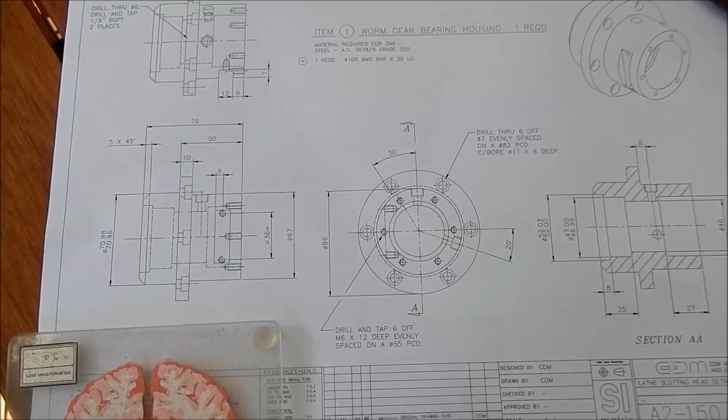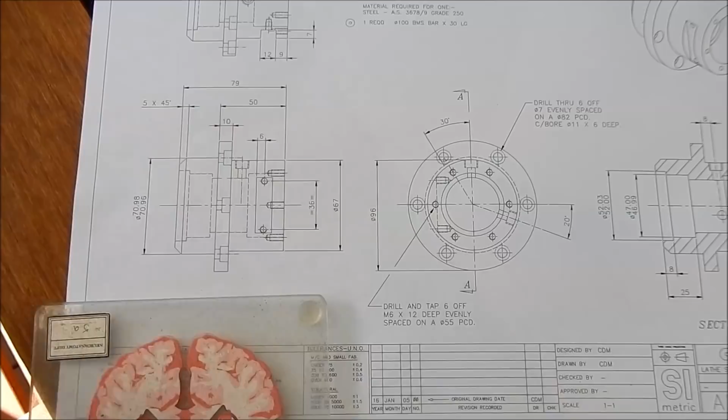Alright guys, so this is the bearing housing we're going to be making up that supports the worm. It's a fairly straightforward turning job, nothing real fancy in this. I've got to put on the OD on that, it's 96mm, so a little bit of milling. We've got to cut the slot for the anchor for the motor adjuster. But other than that, this is going to be fairly straightforward.

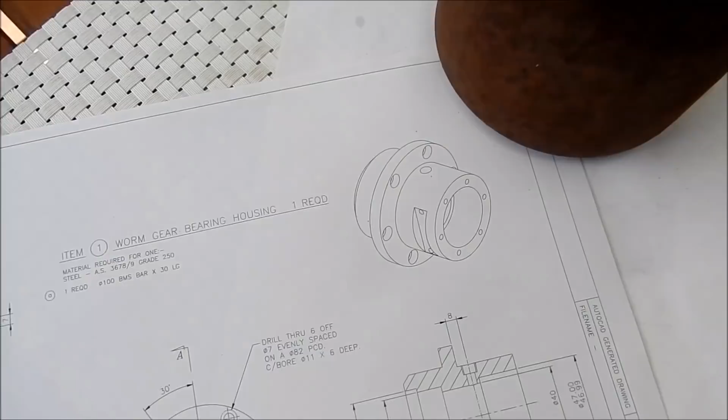I do have to remember the orientation of these holes compared to the slot, because as you know, I did make a little boo-boo on the housing. And I put them 30 degrees out of sync, so I'm just going to make sure that I reorientate that slot to suit where I've actually put those tapped holes in the housing.

Just the bearing cup registers up inside. As I said, fairly straightforward. We've got an oil filler and we've got an oil leveler. This is going to have its own little independent oil supply. It's going to be separately sealed from the main gearbox.

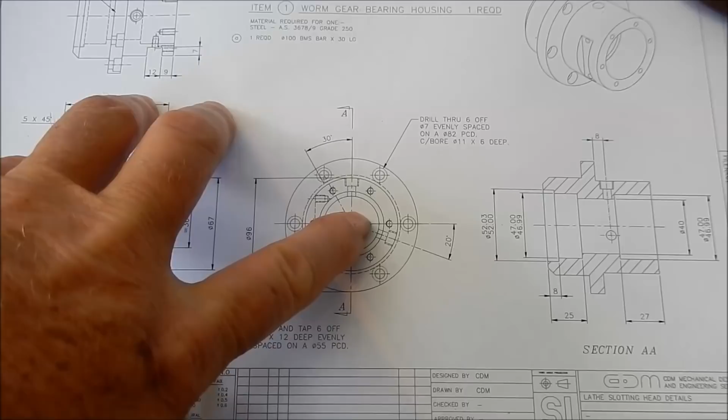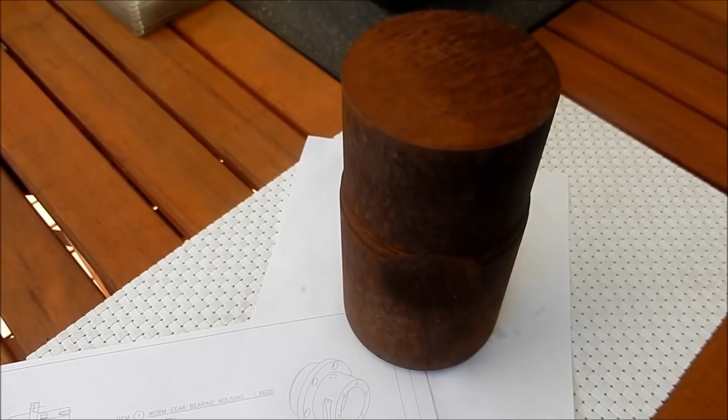And this is the stock we're going to be using to make it up out of. This is stock that I got from my scrap house again. This is probably down to about 200mm. I got this, it was about 1.5 meters. It had been hacked off with an oxy cutter when I got it, and it's always had this smoothed out scoop in here.

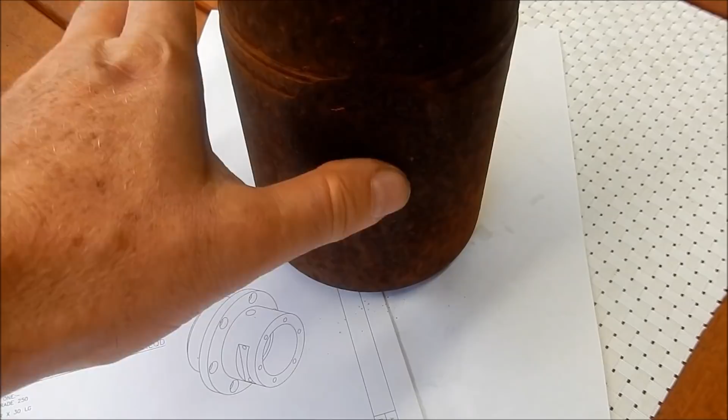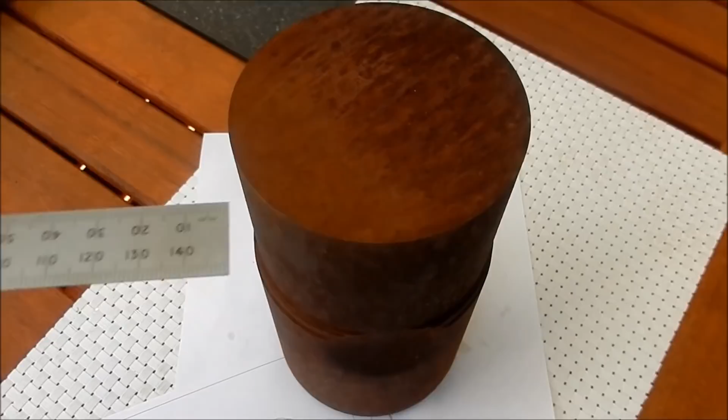Whether, for what it was being used for, it developed a crack, or there was a problem with the machining, it's a non-critical part of the shaft, and it's just had this little spot here buffed out. So I've used a lot of this over the years, and as you can see, not much left. So this is the stock we're going to be using. As I said, the cleanup is 96. And we've got an OD of about 98, so we've got a couple of mil to play with, which is beaut.

So I'll set that up in the bandsaw, and we'll cut that to length plus a few millimeters for cleanup, and we'll get to machining. Righto, so we're cutting that stock off at about 83-84mm, and as I've said in the past, I've refurbished this bandsaw, and it cuts spot on square now, so I can cut pretty close to the finished sizes and know that it's going to be able to machine up. So we'll let that do its thing, and then we'll come back into the workshop, set up and start our roughing out process.

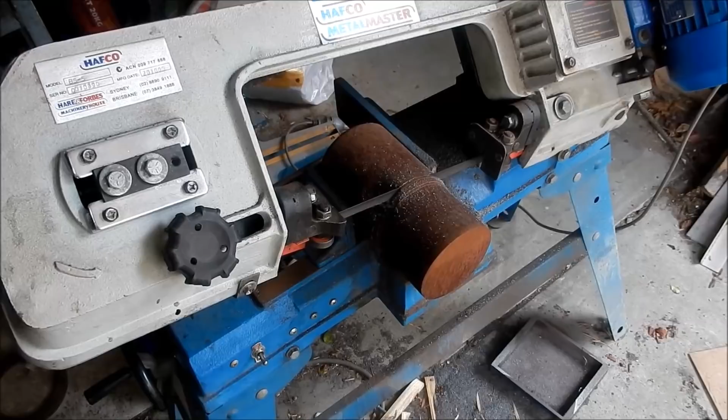Right, we've got our stock centered up in the lathe on the 4-jaw, just roughly. So my plan is I'm holding this side here in the 4-jaw. I'm going to rough this side here out. So I've got to make sure I allow at least 50mm, 53, 54mm to be able to clean up that OD. Then I'll cut and I'll bore. And once again, all we're going to be doing is roughing it out.

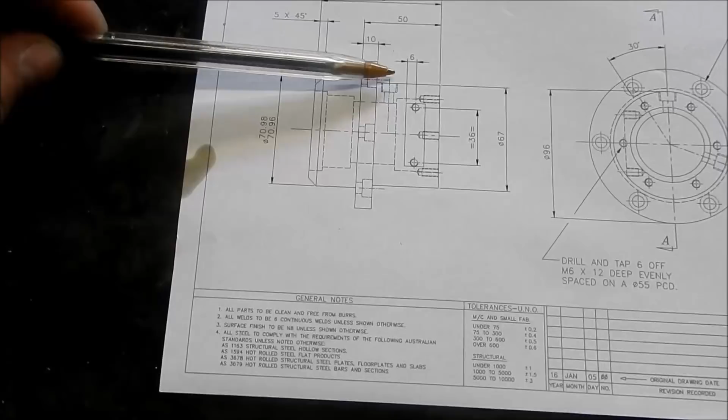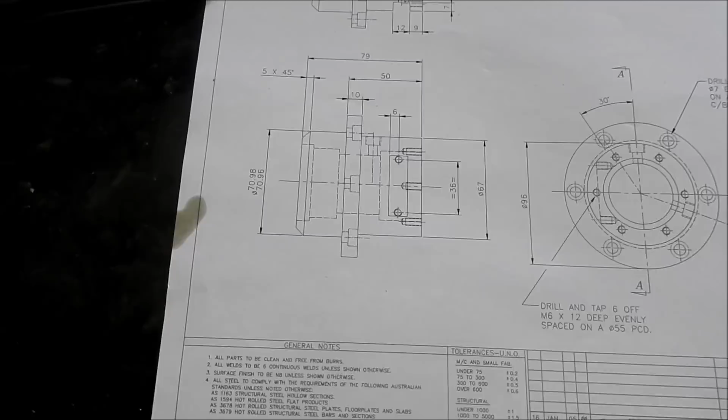Then I'll turn it round. We'll do the machining on here. Get that roughed out, then flip it back, and then we'll start the final machining process once we've got this roughed out. So we'll rough it out about 1mm oversize all over, and then we'll come back and finish it out. Alright, we'll get back to the lathe.

Nice to be finished milling. Nice to be out of that for a little while and do something different. So we'll set the camera up, and we'll make a start.

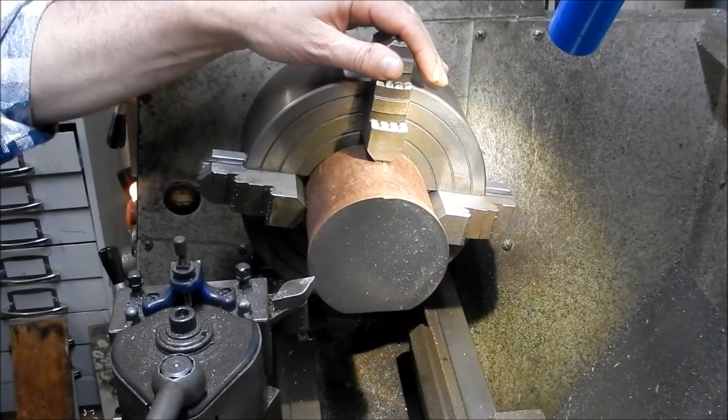Righto. It's just a bit of gnarly steel at the moment. This is probably a 1045. It's not a chrome moly steel in any way. As I said, I had about 1.5 meters of this that I've used over the years, and machined it into various bits and pieces. So I'm comfortable that it's just a medium carbon steel, so it machines quite nicely. Alright, we'll start that roughing out process anyway. We'll get the OD to within 1mm, then we'll start doing all the steps.

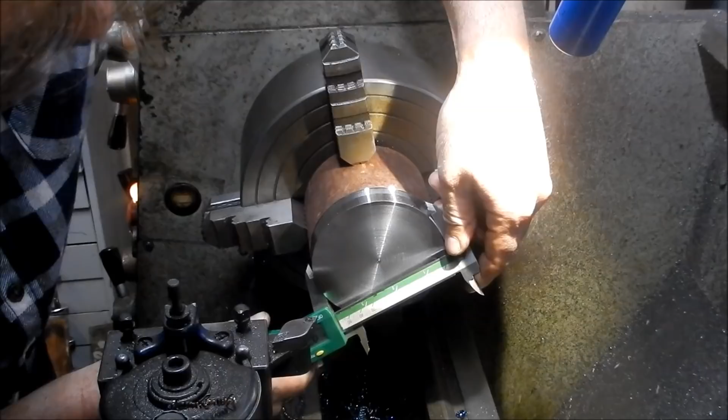We'll just do our roughing out, measuring just with the calipers. So that's at 97, so I'll continue that through. I'll continue roughing this out and bring you back in stages as we work our way through it. So we'll get this side roughed out and we'll come back very shortly. Alright, we'll bring you in for the last couple of roughing cuts.

A little bit noisy with the high feed on that, but anyway, so we're down to about 71.4. And we're aiming for 67.

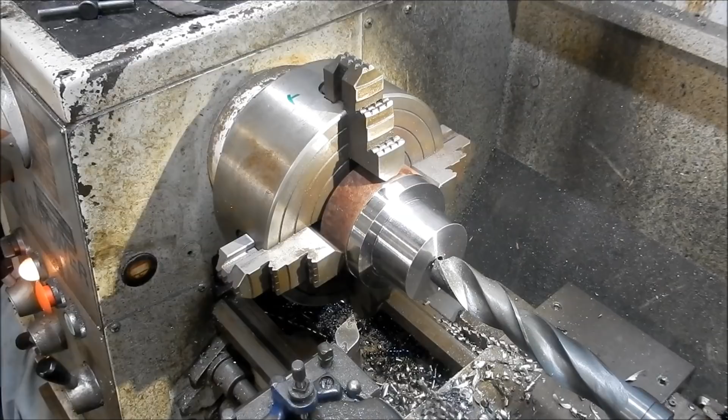Right, finished size on the smallest bore internally is 40mm, and unfortunately my next size drill up from this 30mm is a 40mm, so I've got nothing in between. So we'll drill it out with a 30, and then we'll bore back to size. Well, we'll rough it out to size anyway, and then we'll be ready to flip it over.

Right, can't get the full stroke on this tailstock, so we'll come back, readjust, and go again. Right, we'll set up and we'll get that bore out, and we'll let things cool off a little bit, then we'll flip it over, because that's going to be rather hot. Yes.

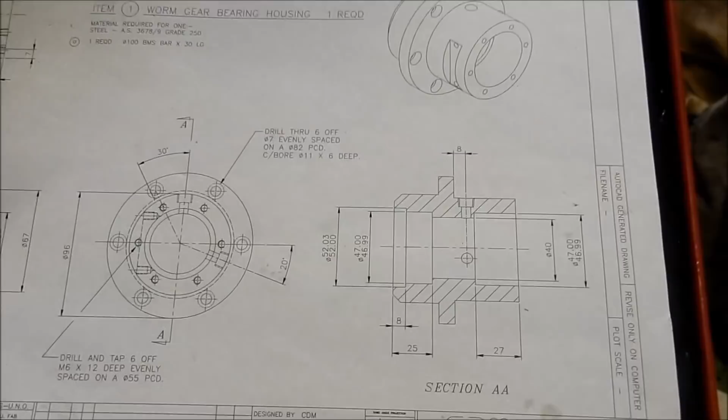Righto guys, back from having a cup with my lovely wife, and my youngest boy is off playing with mates today, so that's let me play in Manland all day today, which doesn't happen very often. All right, I'm going to go handheld here, we'll see how we go.

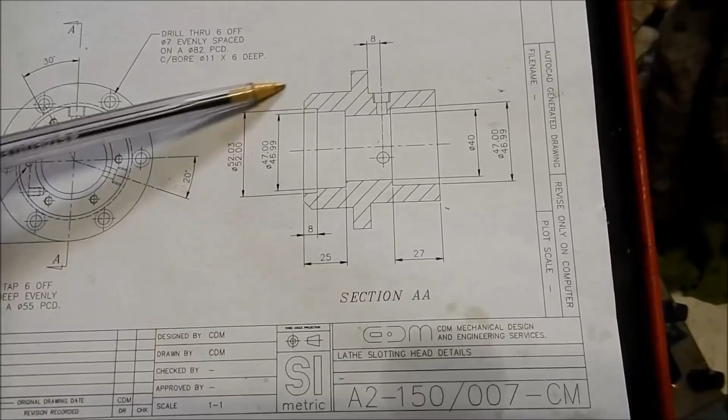Right, so we've got this basically all roughed out, and we're set up on this side here with the jaws. I'm going to finish this out next, so what I'm going to do first of all is bore out the 40mm. Then we'll do the bearing register for the cups, and then the seal register in after that. We can also then machine the OD down there. This OD is a toleranced OD. Where are we? Yeah, sorry. So here we go. Down here. So it's basically 71mm nominal.

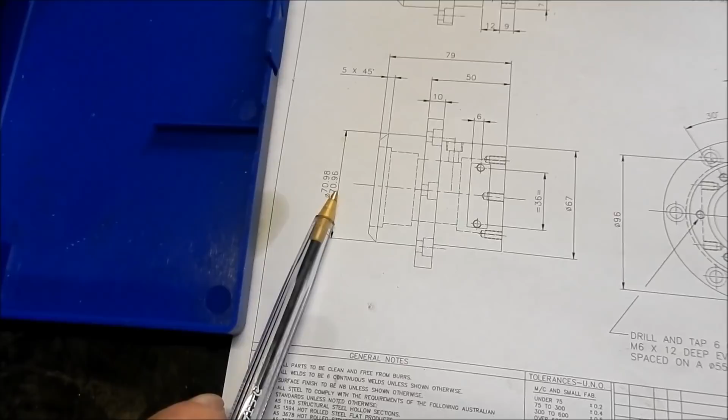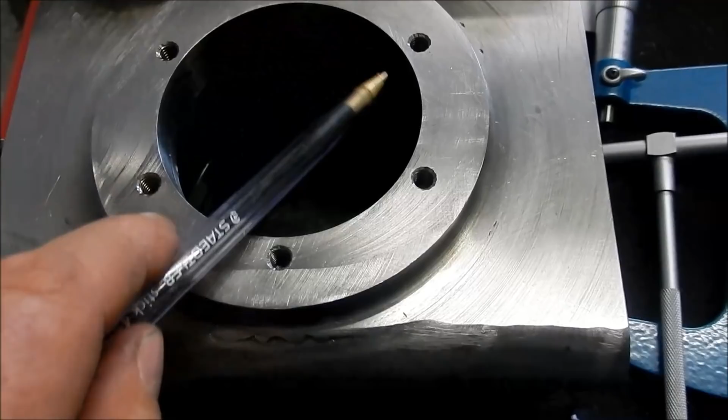Now, you may remember that I got that terrible vibration on that gearbox housing where the compensating ring is, and I've actually taken that housing out just a tad more, and it's measuring up at 71.10. So I'm just going to go 0.005 of a mil shy of that, so that it becomes a nice sliding fit onto that inner bore there. That's what we're going to aim for.

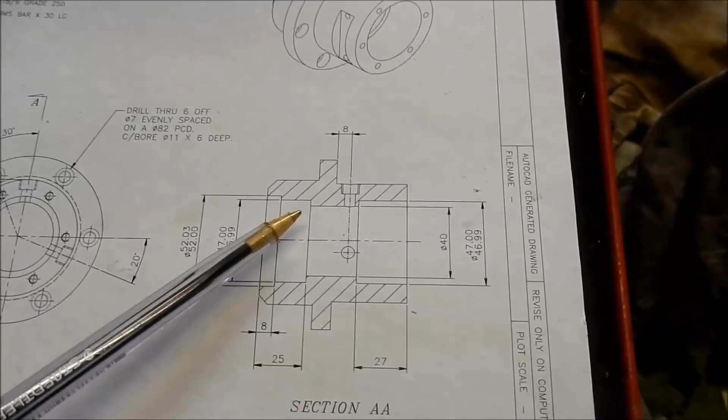The other thing I tend to do too is that where the bearings are going to seat up in here, I've measured them up and they're measuring 38mm at the minimum diameter, and I've made my bore 40. Now I like to make them such that I can get a small pin punch on that cup and take them out. If I was to make that bore any bigger, to get those cups out, you've got to get in there with a stick welder and put a weld around it, and try and shrink the cup to try and get it out.

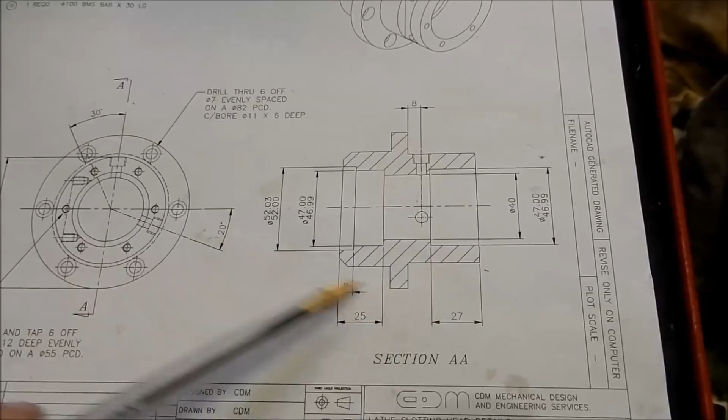So when I'm designing, I'll always try, particularly the small stuff, bit of a different story with the big stuff, but certainly the small stuff, I'll try and give the fitter half a chance when he's disassembling stuff to change bearings, half a chance of being able to get to them, and just use a pin punch to pop them out. Right, so we'll get back up into the lathe and we'll get set up for this final machining operation.

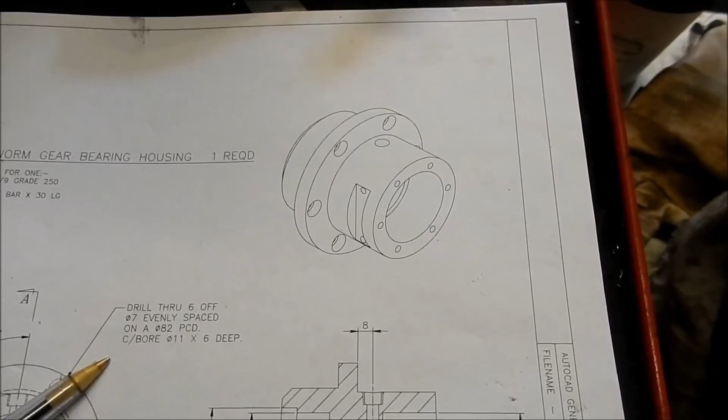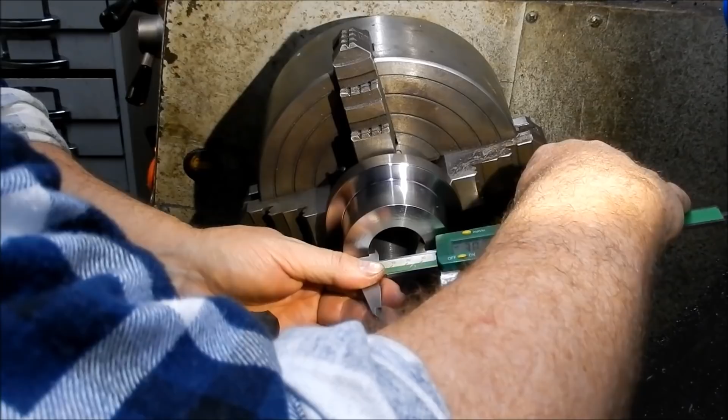Right, so we'll do that 40mm diameter bore first. We'll just see where that's actually sitting at the moment. Just with the calipers, just roughly 38.8. So we've got about 1.2, 0.6 off the radius. So we'll take about 0.5 off the radius. And then we'll remeasure.

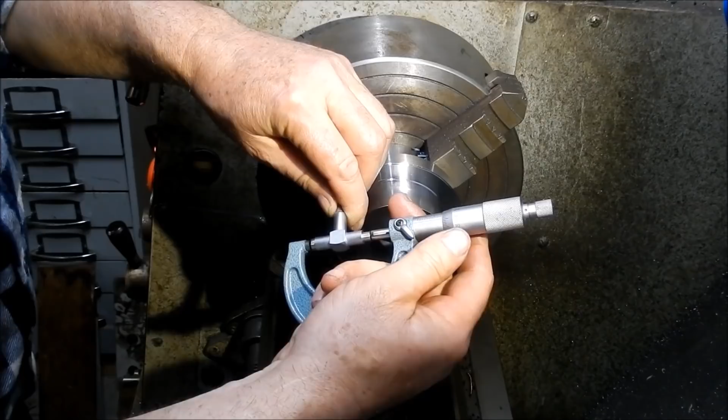Swipe and see where that is actually sitting. Trying to work around this camera stand. Alright, let's have a look. I don't think you'll be able to see these numbers, but I'll just pull it up. Yeah. 6.5. 5, 10, 15, 20, 25, 30. 0.35 left to go. So, how about 0.17? As I said, this isn't a working diameter, it's not a critical diameter, it's only clearance for the shaft to go through. What do we say? 0.17.

We'll see where that's sitting now. That's 40.03. As I said, it's just a clearance hole, not critical, but sometimes it's good to start getting a bit of a mindset right and ready when you start doing these tolerance fits. Even though they're non-critical, sometimes it's good to, as I said, just get your mindset and work to those tighter tolerances. Yeah, 0.03 up.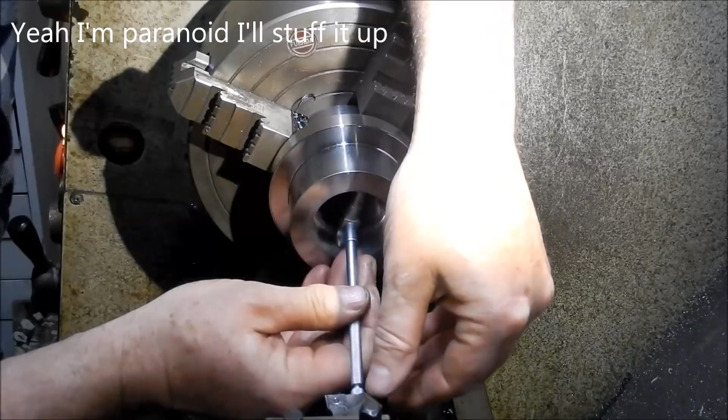Measuring up at about 91. Let's do one more check on that. Yeah. Alright, that's 92. I'm happy with that. Still one more. We're going to have too much drag on that first one. Yeah, that's bang on 92.

So I want to put around about a 0.01 to 0.02 mil interference onto that cup. So given that, to bring it back to 98, that'll give us 0.06 of a mil to take out, which is 0.03 on the radius. So I'll give that a lick. Before I do that, I'm just going to give this face a very light lick to zero that out, and then come down to depth, and then we'll face out. So I'll do all three operations in one go.

Zero out that Z. Oh, that's much better. Right. Let's come down for the money shot. So 0.03. Finish this out.

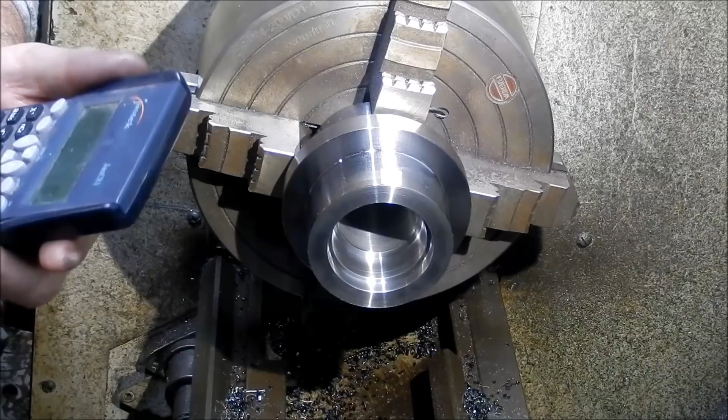And yep, I'm happy with that. I'll just give it a bit of a lick with some emery inside there, and we'll let that go. All right. Right, we're getting down towards the money end now, so 71.58 to go. 71.58. Now the target size is going to be 71.08. So exactly half a mil to go. That's 0.25 off the radius.

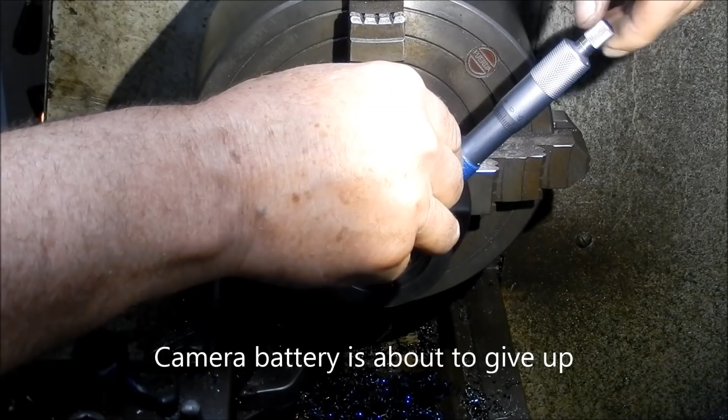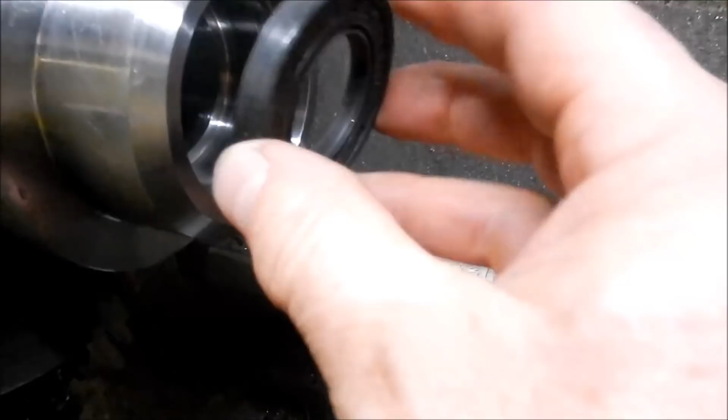Hi guys, we're back again. It's the day after, and the battery went flat on the camera, so we didn't see me finishing out all the diameters and cutting that 45 out for that clearance on the worm shaft. But it's all done on this side. We've got to flip it over. So that's going to be a tight fit in there. So we've got the seal fitted up okay.

Now I have bored down very, very lightly on this just for a short length, just to get that registered before it goes in. So what I'll do is I'll warm this housing up a touch just to open it up, and allow that to seat home. Right, and then the main one is the housing, so I'll just pop it up on the stand and we'll show you how that fits up. And this is the main housing fitting into place. Right, so that fits up beautifully.

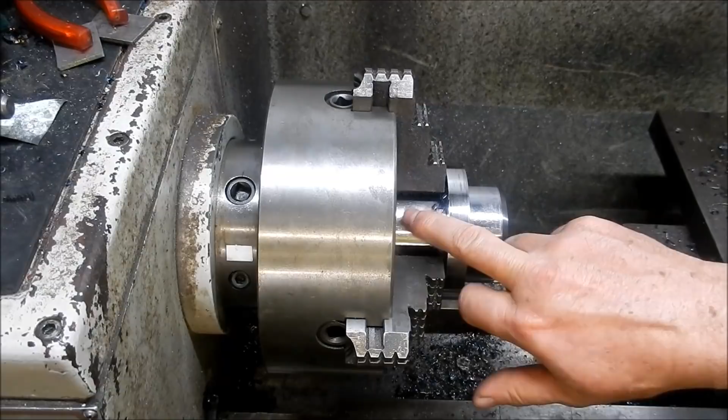So I'll turn it around, we'll reclock it up again, and we'll finish off the OD on this and the bearing bores inside. So we'll get set up to do that, and we'll be back soon.